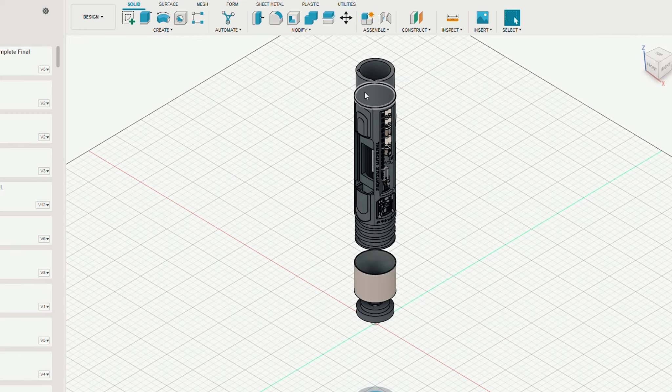So this is the chassis that I designed for this particular hilt. The first thing you probably notice is this white lens here. In the grip of the hilt, initially Nevin had a steel baffling. The client really wanted holes drilled into the baffling so we could get some shine through from the chassis, from the inside of the hilt through that steel baffling. So that's what these are for.

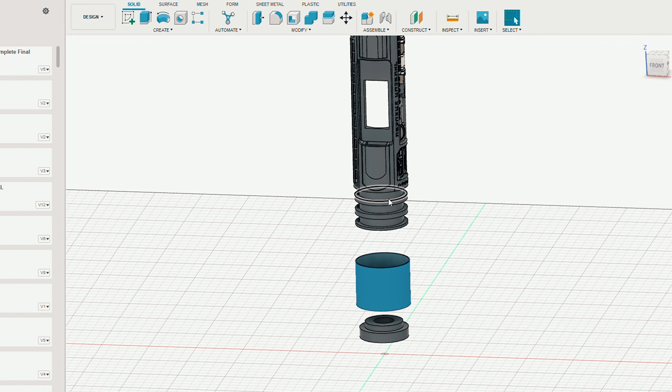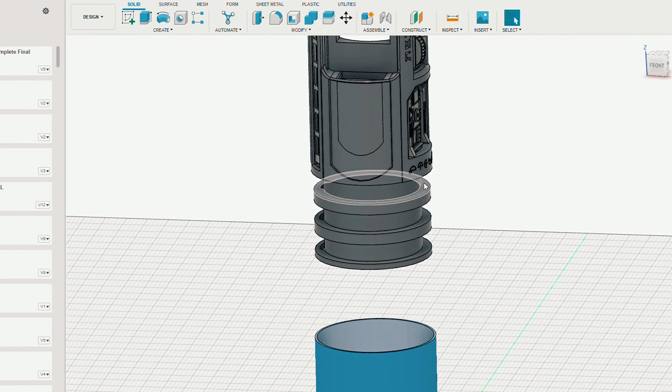So I've got 3 channels with 3 2020 Neopixel strips. The way I put them in, these 2 are running in the same direction and this middle one is running in the opposite direction, so we get some interesting animations. They're all set up as one single blade, all the same blade. But turbine animations are a little bit neat because you've got this center one going clockwise, for example, and the other 2 going counterclockwise. So it allows for some interesting animations.

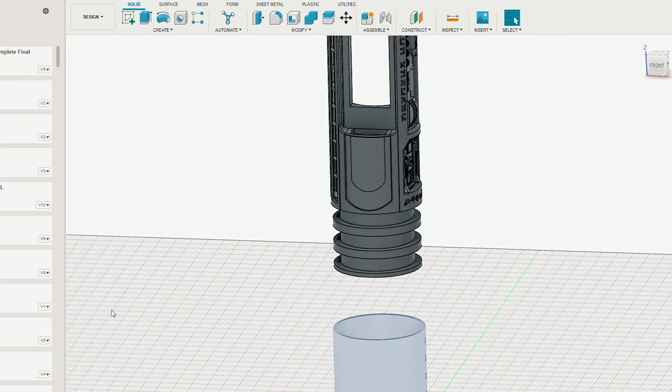And around that, I have a piece that I printed off in translucent resin, and that slides over this. After I wired up my Neopixels, I slide this lens up above and it covers them.

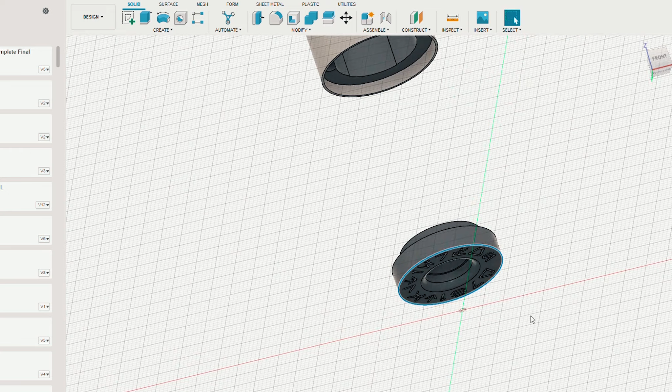And then we also have a speaker pod in the pommel. I utilized a 2-conductor Pogo pin connector from Smugglers Outpost. It was my first time using one of these, and it was great. What I really love about them is each end is the same diameter, so it's nice and easy. No getting crazy with square pogos, 2 little tiny baby square pogo pins, none of that nonsense. We've got 2 really easy, same size diameter, pin side and conductor side.

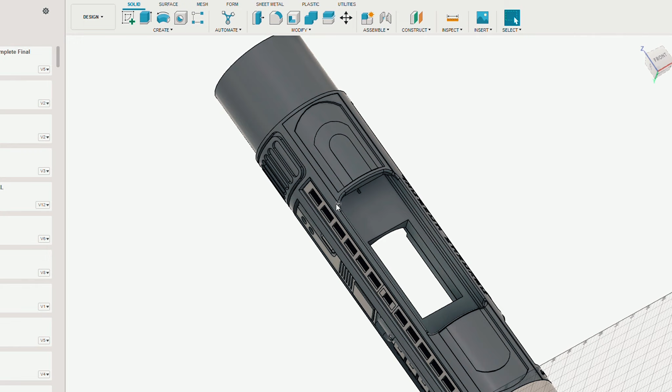Really nice. So I put that into this cap section, and then that cap is glued up into this section here. And other than that, just our usual setup. So I've got a proffieboard that sits in this tray. It press fits and then slides up just a little bit underneath this lip. We've got a kill switch in this area.

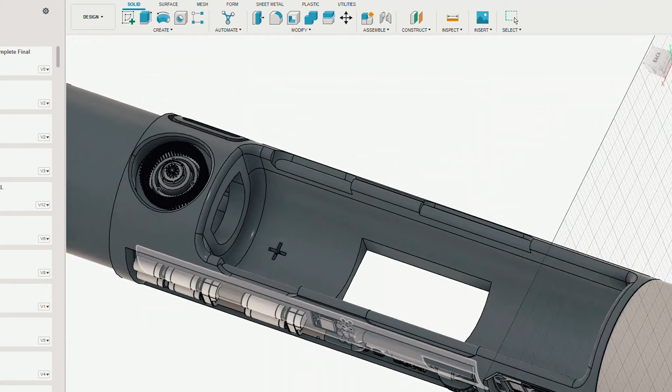And that's pretty much it. Nice and easy, static chassis. It is held in place with a set screw to the upper part of the hilt here, and this is where I bring my conductors up, so my 3 switch conductors and my 3 blade conductors, and that's it. Nice and easy, really straightforward setup.

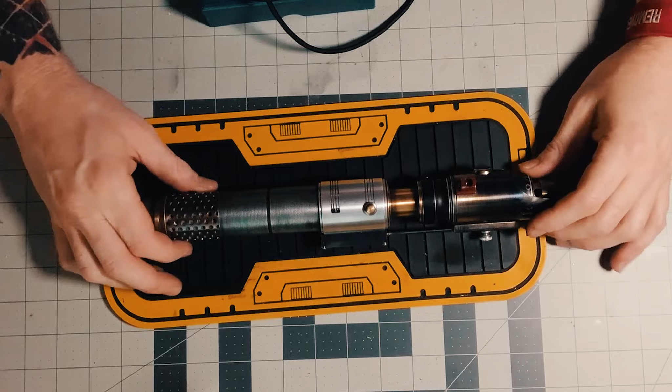So let's talk about the hilt. Here's the hilt. Again, just a really solid, unique, one-off build from Nevin at Space Junk. We've got a D-ring down here. I don't know where this stuff comes from. Some of it looks vaguely familiar to me, like it always does. This almost looks like a hose clamp section, right?

From like a garden hose. I don't know, maybe that's what it's from. Who knows, it might be a coupler from a hose.

I don't know, steel baffling is here. The client did request that holes be drilled out so we get shine through. So each one of these holes Nevin drilled out,

and then went back and finished it. Knurled grip, really nice, really nice graphic section here. I think this might be from a Saber Forge hilt, maybe, I don't know. Anyway, main and aux buttons, these are both from Phil at Kalyminan Customs.

Really, really cool rod coming up to the top section here. Everything's been heat stained, so this top section is probably steel, or maybe brass. And that's it, right? Just some really, really cool greeblies. Custom blade plug, really a really nice solid hilt.

So let's talk about how to use it. The way I've been doing this is I take my pommel off first. And here is the speaker pod in that pommel. This is a 24mm speaker.

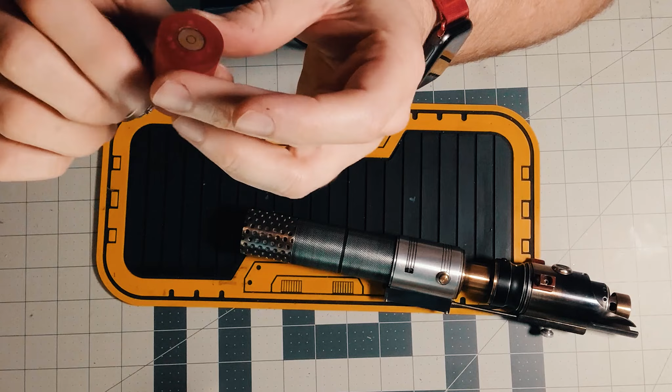It lives in the pommel, okay? And there's that PCB pin, a speaker pin, PCB Pogo speaker Pogo set, from Smugglers Outpost. I really, really like those because they're easy to size for, both same diameter on both ends, right?

So then I take my grip off. I already have a battery in here. So here is that lens that I created. I printed it off in translucent resin. And that's it, right? So we get some really cool

animations on those rings. Obviously you're not hearing anything because that speaker is not connected yet. And that's it, so we get some really, really nice

animations on that, really, really cool touch, right? So you get your battery in, you turn your kill switch on, screw your grip on, pommel. All the spacing is perfect, so you just screw your pommel in until it stops, and then you're ready to go.

So there's that baffling section, let's come down to the bottom here. Really, really nice, just perfect shine through, like that. Let's see.

Hello, Zuko here, so here we go. Got a few different ones, two different animations. I think that one's my favorite because I set that blade style up to have an emitter flare, and it's got a blue emitter flare. Cool, really, really cool, love the way that came out, right?